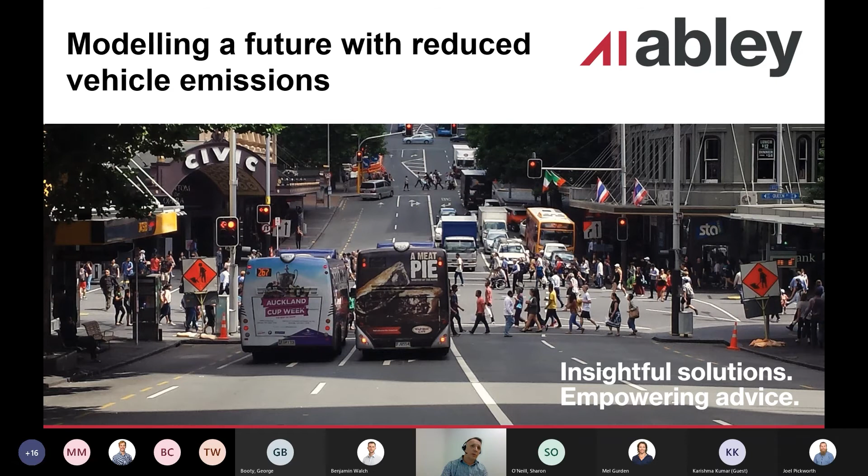So this presentation, I actually prepared it for the MUGS conference, which was held virtually over the last few weeks. So it did come from an exercise where I was trying to use a transport model in different ways to be able to calculate vehicle emissions. And also apply it to the new procedures that have recently been released as part of the Monetised Benefit and Cost Manual. So an overview of the presentation, I'll talk about the changes in the Monetised Benefit and Cost Manual procedures, show an application where I've used a model to test several different spatial planning scenarios from Queenstown Lakes District, and then pull out a few learnings to share with you all.

Firstly, the emissions calculations. So there's a new procedure that was released in August as part of the version 1.5 update from Waka Kotahi. This slide just shows the previous calculations, which were essentially calculating the carbon dioxide emissions as a function of vehicle operating costs for links, and then for intersections it was a function of the amount of fuel use on the transport network. There was a fixed price of around about $65 per tonne, which I understand reflects the current trading price fairly well. But there wasn't a specific procedure which took into account changes in the vehicle fleet in terms of different fuel types.

So the most recent enhancement is somewhat more complex and reflects the direction of industry far better in my view. It takes into account not just the fleet composition in terms of light and heavy vehicles, but also the different fuel types that are being used with the emergence of hybrid and electric vehicles and the increased uptake across New Zealand. It takes into account speeds and the relationship between speed and carbon emissions. And it also has a low and a high cost. Now those costs are based, there's not a lot of detail online about how they've been calculated, but I understand they reflect shadow prices. So it reflects the cost in relation to emerging national and international targets around carbon emission reductions.

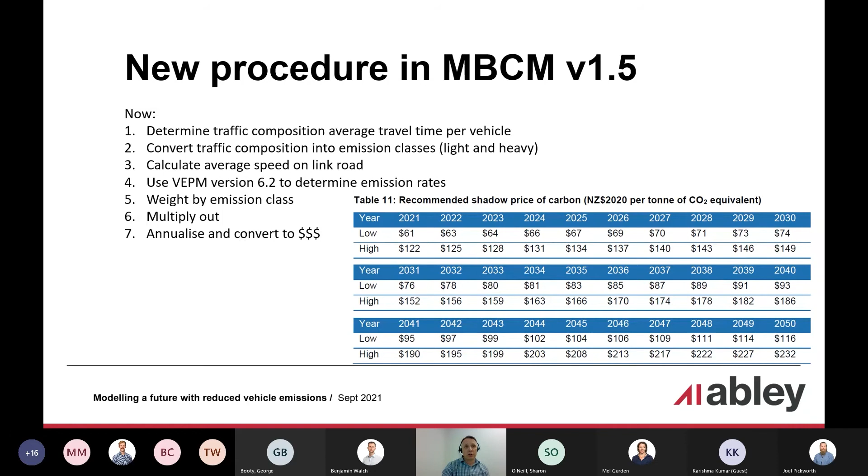One of the key components in the new methodology is to tap into the vehicle emissions prediction model. So you can apply to basically get access to this. And I'll just quickly talk through a couple of the key features here. In the top left corner, it allows you to put an input year there. So if you're undertaking a future assessment, it has default values that are linked to the likely different fleet composition in the future, as well as the different fuel mixes. And you'll see there's a mix of petrol, diesel, hybrid, electric vehicles.

Another key input in the middle is speed. So the way that speed is used is it reflects the average speed across an entire journey, and it takes into account congestion, it takes into account acceleration and deceleration. And there are a number of other user inputs. So for this modelling exercise I've undertaken, I've just used the defaults that sit within the model, but clearly there's a lot of detail there, a lot of intricacy if you choose to go down that path.

Another interesting change is that the model is used to calculate a carbon dioxide equivalent, which isn't just the carbon dioxide emissions themselves, it also is a function of nitrous oxide and methane as well. So it's a more complex calculation that is included within the model.

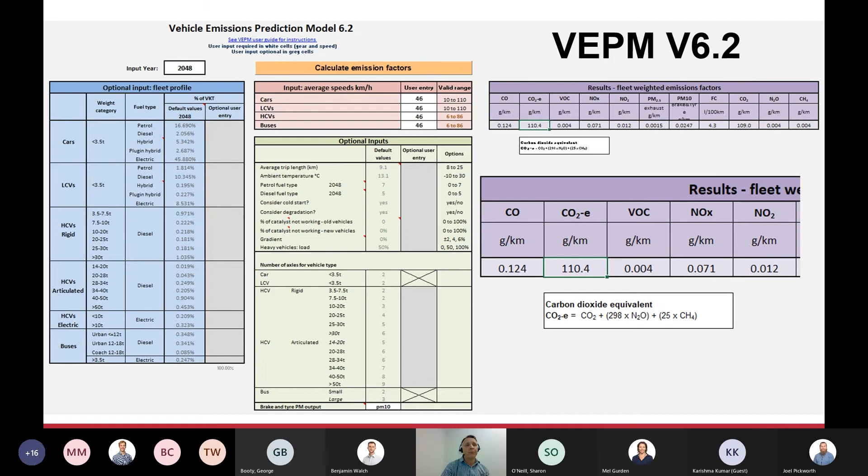And this shows a couple of key trends. So on the left is the carbon dioxide emissions, and that's presented on a per kilometre basis and as a function of the average trip speed. And as you'll see on the left-hand side, the lower the average trip speed, so therefore there's a lot of congestion, a lot of acceleration, a lot of deceleration, the higher the relative carbon cost. And then as the speeds increase across the journey, the average carbon per kilometre cost comes down.

What's interesting there is I've also included a 2018 and a 2048 set of rates, and you'll see that for 2048 it comes down markedly to about half the value of 2018, and that's as a result of the fleet composition, which is a nice segue into the right-hand side, which shows two things. In orange, it shows the default assumed percentage uptake in hybrid and electric vehicles for New Zealand, which currently sits at around 3 or 4%, with that increasing to over 60% over the next 30 years or so.

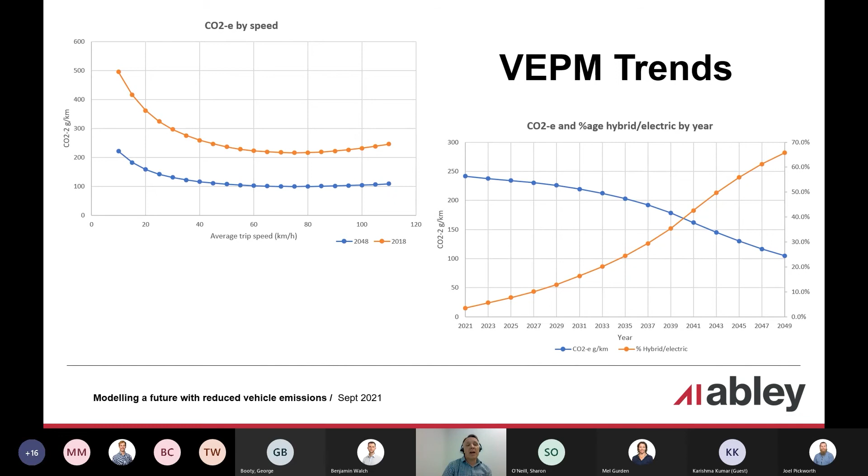In blue is what that actually means in terms of the carbon dioxide equivalent emissions on a per kilometre basis. So you can see that changing vehicle fleet is resulting in a reduction over that 30-year period. And what was particularly interesting in this assessment was that we had previously undertaken some similar calculations using the vehicle fleet emissions model from the Ministry of Transport, and some of the previous predictions had, by 2050, upwards of 80% of vehicles being hybrid and electric. So the updated model is not as aspirational, or optimistic, around the level of hybrid and electric vehicle take-up.

I'll now demonstrate the modelling application, which we undertook in Queenstown. Just in short, here's the process. We used the Queenstown Lakes District Tracks transport model and derived the speeds from each model for different times of day. This was broken down on a trip-by-trip basis, so it looked at where the origin was, the destination was, calculated the average speed, and then used the vehicle emissions prediction model to turn that into carbon equivalent emissions on a per kilometre basis. That got aggregated across all of the trips for each period.

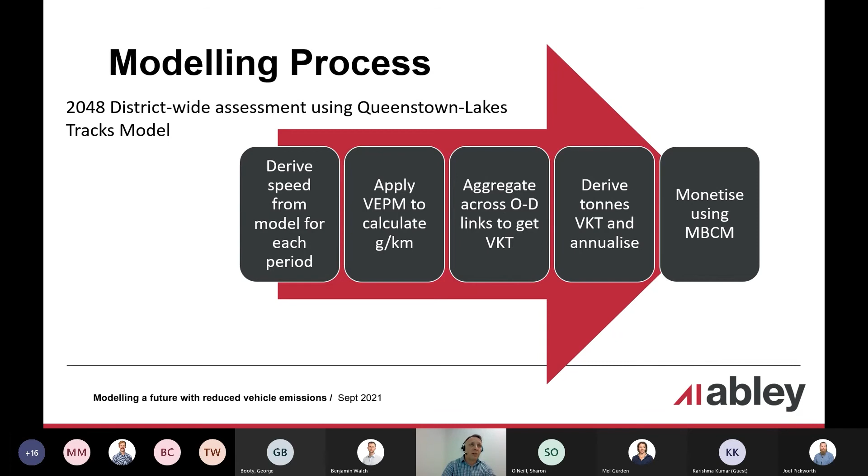We undertook this assessment at 2048, and then derived an annual figure by putting in some expansion factors from the individual periods to represent annualised vehicle kilometres travelled. And then it was monetised using the procedures in the Monetised Benefit and Cost Manual. On the left-hand side, you'll see that we've got the 2018 emissions in orange, and in grey the 2048 emissions. So there's about a 6% net reduction.

Now, I mentioned before a previous assessment we'd undertaken where 80% of the fleet was hybrid or electric. That resulted in a very significant reduction, around 30 to 40%. So the less aspirational predictions around hybrid and electric vehicle take-up have resulted in a less significant change. We did a bit of calibration against an Ernst & Young report, which had the Otago region greenhouse gas emissions profile, and the model was within 5% of the values there district-wide, which was really encouraging. So that calibration gave us some confidence in these results.

Interestingly enough, for those that have been around for a while and remember the Project Evaluation Manual, which was before the EEM, there was a simplified procedure to assume that carbon dioxide costs were 4% of VOC. When I had a look at this analysis, it was actually equivalent to around 4.1 to 4.4% of VOC if we assumed the low cost. So that was an interesting bit of back validation, if you like.

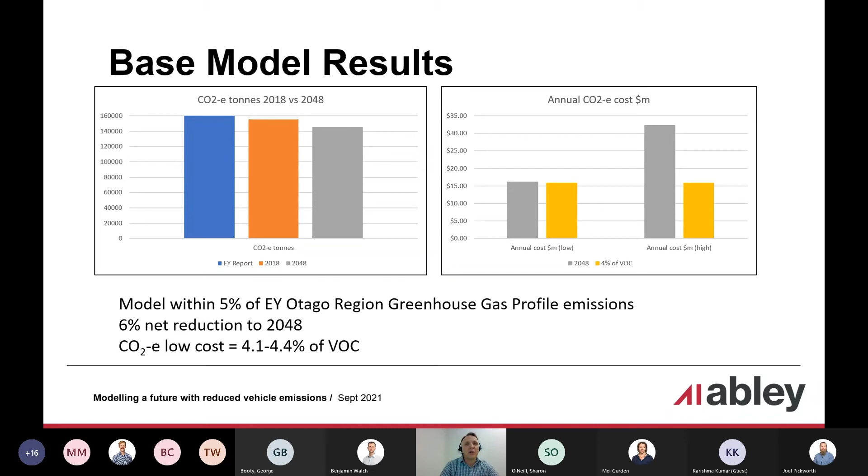As part of this exercise, we took 3 spatial planning scenarios. This is from an early iteration of some work which I've undertaken with Queenstown Lakes District Council and Waka Kotahi, looking at basically how the district should develop. As part of that, we looked at an intensified scenario with more development in the existing urban areas, expansion pushing out into greenfield areas, as well as an interesting scenario we called connected settlements, where we looked at 2 towns growing up from next to nothing.

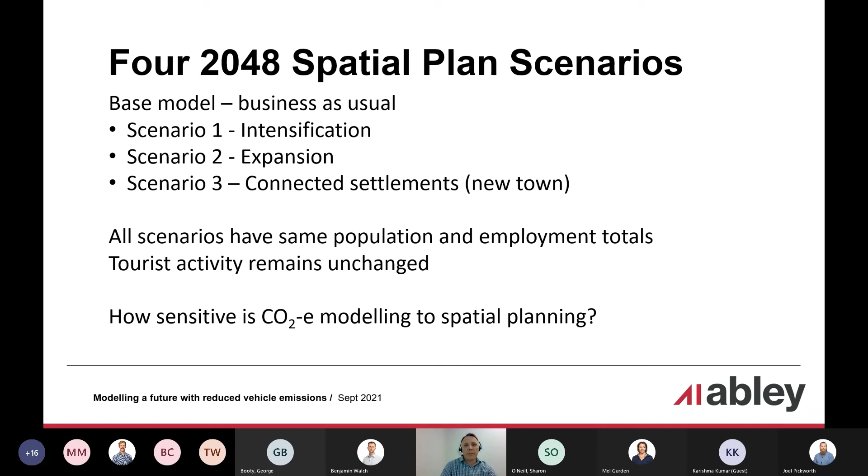All of the scenarios were looking at changing where residential and commercial development was in the district, but they maintained the same population and employment totals, and the tourist activity, which is obviously a major thing in Queenstown, remained unchanged. So the intention was to look at how sensitive the spatial planning scenario is in terms of how it influences carbon emissions. Here's a quick overview of some of those changes. These were not bookend scenarios, so we didn't throw everything into the urban areas, but they reflected moving in different directions in terms of planning against a future baseline.

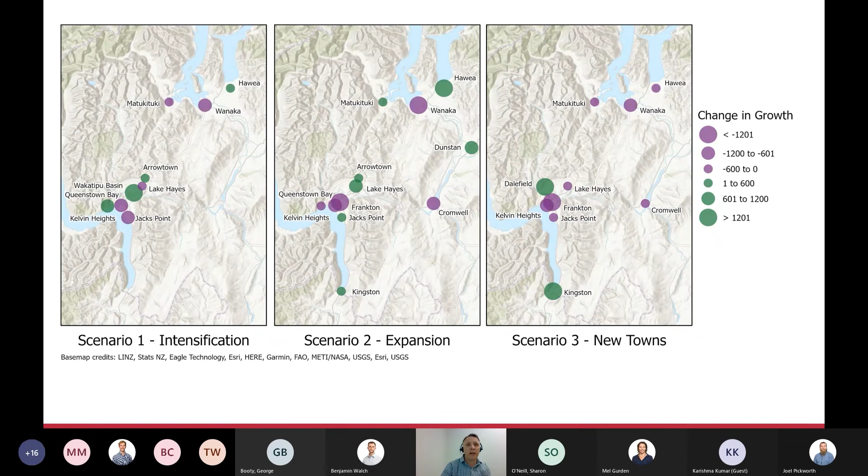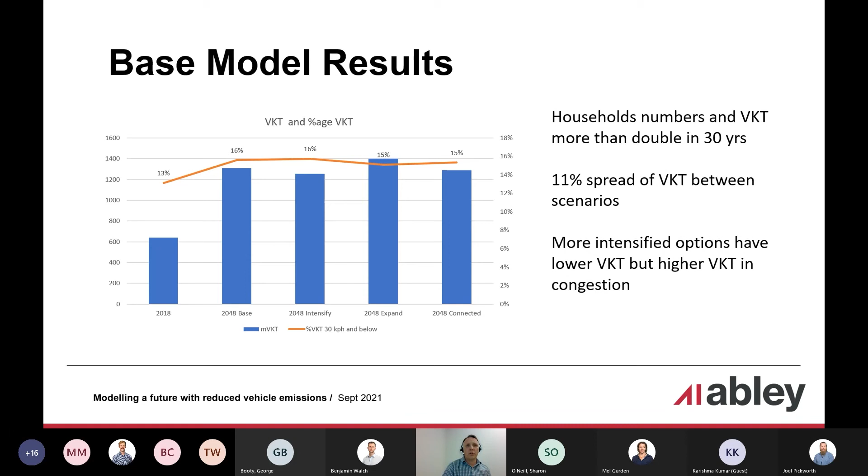So the results were very interesting. This graph presents the VKT. Queenstown Lakes District is a very high growth area where household numbers are looking to double within 30 years, and as a result the VKT roughly doubles as well, as you'll see comparing the first 2 bars in that histogram. The scenarios result in about an 11% spread of VKT, with less VKT for intensification and more VKT for expansion. And interestingly, the intensification scenario, as well as the base, had a higher proportion of VKT in more congested areas, which attracts a higher carbon cost.

In comparing the scenarios, the total carbon dioxide tonnes on an annualised basis has come down from 2018 to 2048. It's roughly that 6% that we referred to in the earlier slide. Intensification comes down and expansion goes up. But as you see, it's not a massive difference. But once again, these were not bookend scenarios that we were looking at.

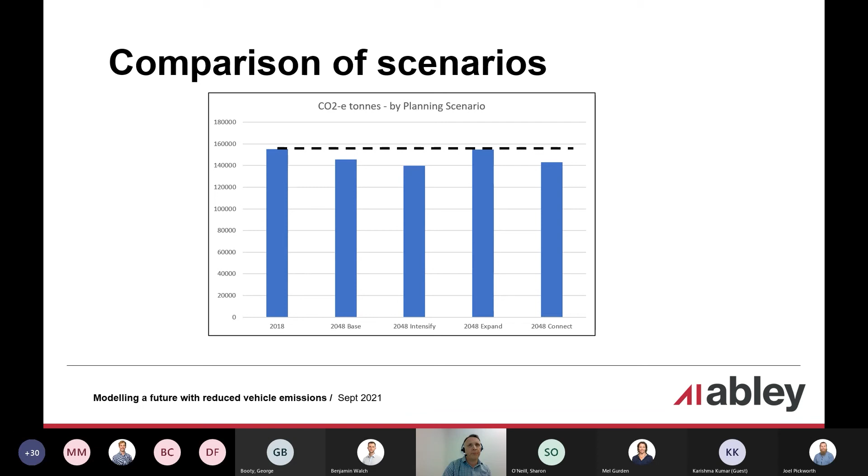Overall, the difference in the results: the intensification had 4% fewer carbon dioxide equivalent tonnes and corresponding costs. Expansion was 6% higher, so not a massive difference. But by contrast, the shift in the mix of the fuel types that are used within the fleet reduced emissions by around 54%, and that's with hybrids increasing from the current 3% to 8% over that 30-year period, and electric vehicles increasing from less than 1% to around 55%. So a very, very significant shift there, which in this instance made a lot more difference than the scenarios that we were looking at.

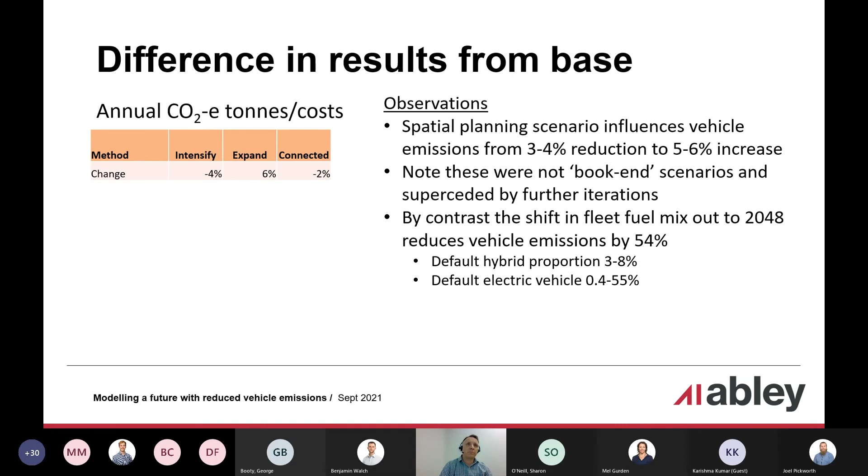So how do we manage growth and development? Yeah, that's an entire presentation or even a thesis unto itself. But just a couple of general trends I picked out of this in terms of an expansion model versus intensification model. Clearly, with an expansion model, you've got more VKT, but those VKT are happening at higher speeds than intensification, which attracts, in relative terms, a lower cost. There's a more dispersed effect on the network in terms of where congestion is occurring, as opposed to intensification, where it's more concentrated and often in existing congested areas.

Expansion is less likely to attract mode choice in terms of sustainable modes, whereas with intensification, it's a lot easier to be able to walk and cycle to destinations and provide for public transport. So this is pretty much transport planning 101. I'm not teaching anyone anything new here.

One thing that was particularly interesting, though, I found a Scandinavian paper which surveyed electric vehicle users, and it was interesting that in rural areas, people were twice as likely to have an electric vehicle than in urban areas. I don't know how that would apply to New Zealand because I haven't seen similar data, but what I took away from that is that, in this particular instance, it was people that were travelling 20 to 80 kilometres per day that were most likely to be electric vehicle users, as opposed to those having a small amount of trips, or those that probably required more reliability because they were doing a lot of Ks each day.

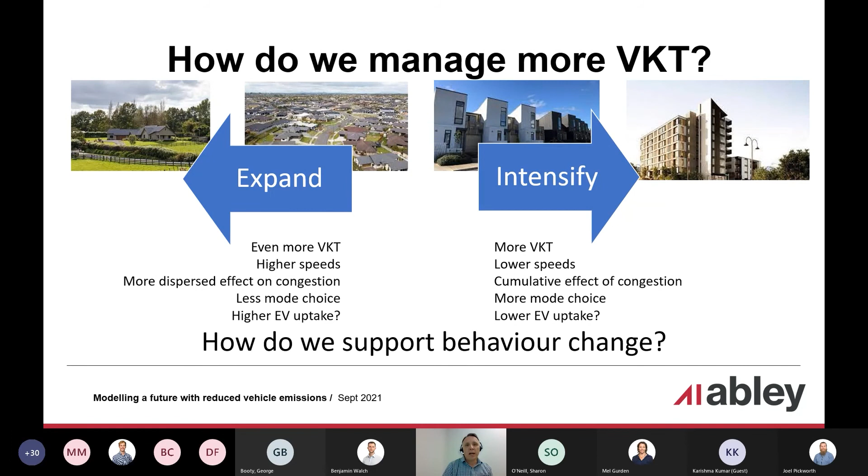So it's an interesting article. I encourage you to go away and read it. I'm sure there's plenty of other literature there, but it certainly, for me, hammered home that as an industry, we need to take people on this journey, and it's going to be a tough ask.

So what next? Some of the things I took away from this small modelling assessment exercise is that we can't just rely on technology alone, and we need to think about other things. In terms of spatial planning, for example, maybe we should be thinking about somewhat more of a bookend approach rather than just stretching things in one direction or another. Trying something a little bit more extreme.

Regardless of what we do, we need to provide for modal choice, both in terms of destinations for people to be able to get to from new development areas, but also in terms of infrastructure so that they can walk, cycle, use public transport to be able to get where they need to go.

Behaviour change programs are fundamental to this, and that article I was referring to, I guess, demonstrates the challenge there. And behaviour change programs, yeah, there's very much the carrot and the stick, but yes, a challenge for the industry there. And ongoing monitoring is something that I certainly encourage, such as local authorities undertaking mode share surveys to look at how we're tracking over time.

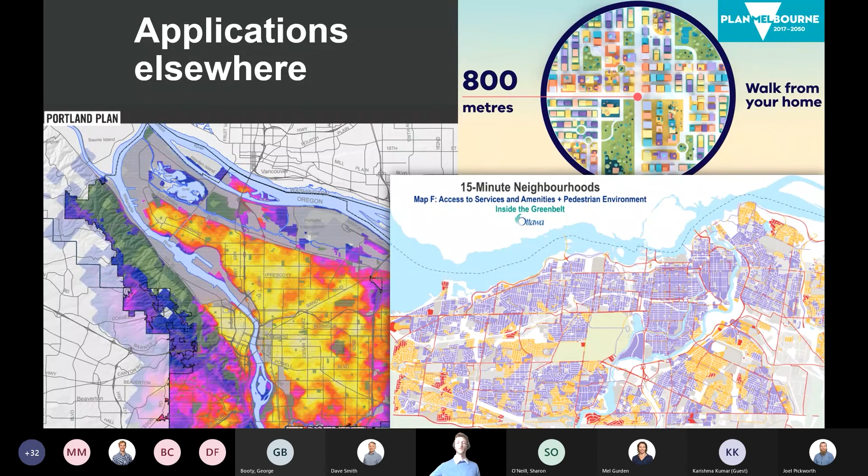How to measure each of these key city living functions that people need to be in close proximity to. So in our geospatial assessment at Abley, and I want to thank Andy and Maz for the great work on the geospatial assessment, we used open spaces and cafes as a measure of the enjoying function. Now, we could have used many other things, but these are services that most residents use fairly often. And we use supermarkets as a proxy for the supplying function, excluding dairies though, because they're not quite providing all the grocery needs.

Primary schools as a proxy for learning, and GP practices as a proxy for caring. So we use these four types of destinations to measure whether people are within 15 minutes walk of essential services. Now, we didn't include the work function. Work is a bit tricky because you obviously don't necessarily work in your neighborhood. That depends on your skills, your industry. So you may need to get a job that's on the other side of the city just because it's a fairly niche industry. So it doesn't quite work the same way.

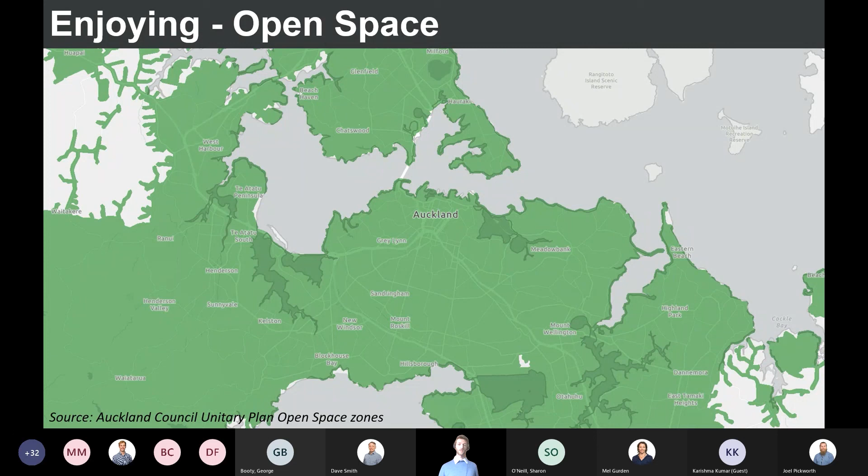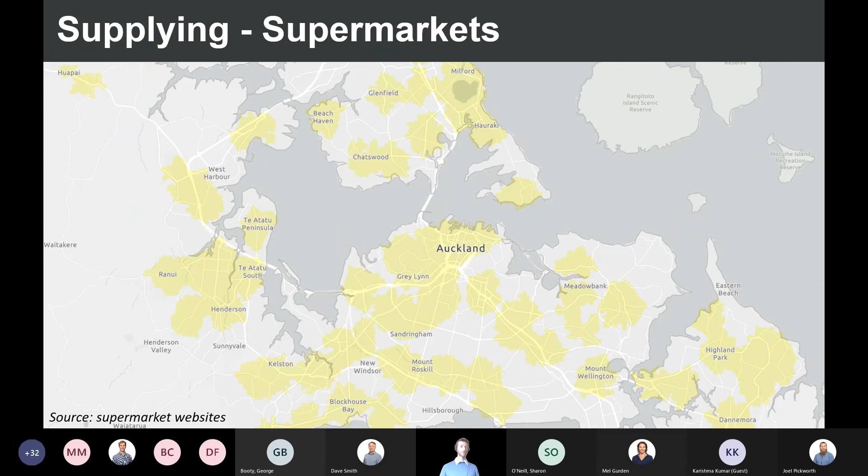Across the whole of the Greater Wellington region, we've assessed that 30% of the population is within 15 minutes walk of all combined factors. So that raises questions on how we can increase accessibility for residents of other areas, or how can we bring more residents into the areas that have already got this really good accessibility.